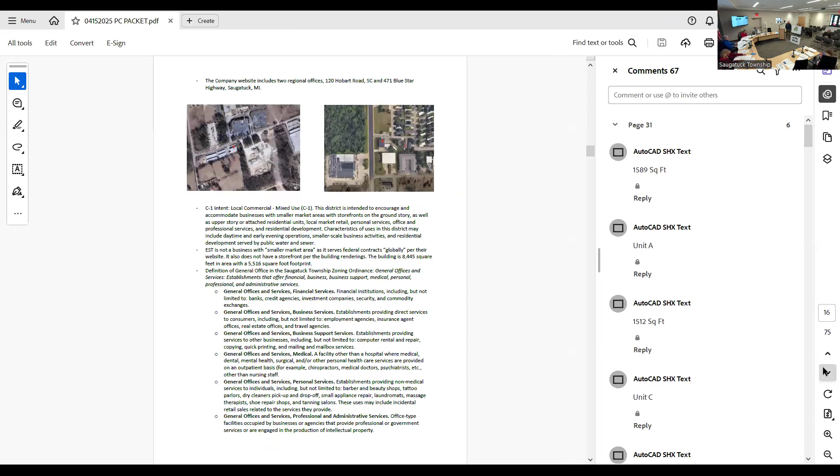For open space, the open space may include the area along the east parcel line, which is where they're showing the trail. They're still showing a trail, and their notes reference that there would be strategic clearing, but they do intend to put a trail there. We received some comment questioning whether that's necessary, or whether it could just remain untouched open space.

The trail is private and the pickleball courts are private.

In terms of the site plan itself, I went through the comments on the parallel plan. I think some need to be adjusted. They did update the lighting fixtures. They do have more parking than is required by the ordinance. So we question if the pickleball courts are private, then is parking necessary back there? And any reduction in impervious surface would reduce the amount of stormwater runoff and the need for a drainage basin of that size. We don't have review letters from the fire district at this time.

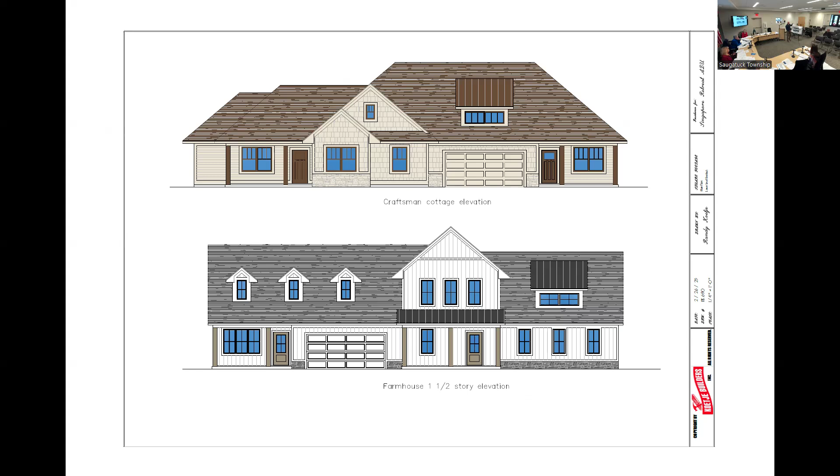This lower one, I was gonna go through everything, but we'll get it a little bit at a time here. So the lower one here, those, that's four units. These two buildings here, those are the side loaded, corner, if you will. The rest of them are either the Craftsman. So these are two of them, those are the side loaded. They're all side loaded, but this is a 1.5 story, the farmhouse bottom rendering there, just on those two. Corner with this.

Do you have the rear of that one? No, we don't. The rear of the townhome? I don't think so. No, it's not even drawn. Okay, exactly, maybe, we'll see.

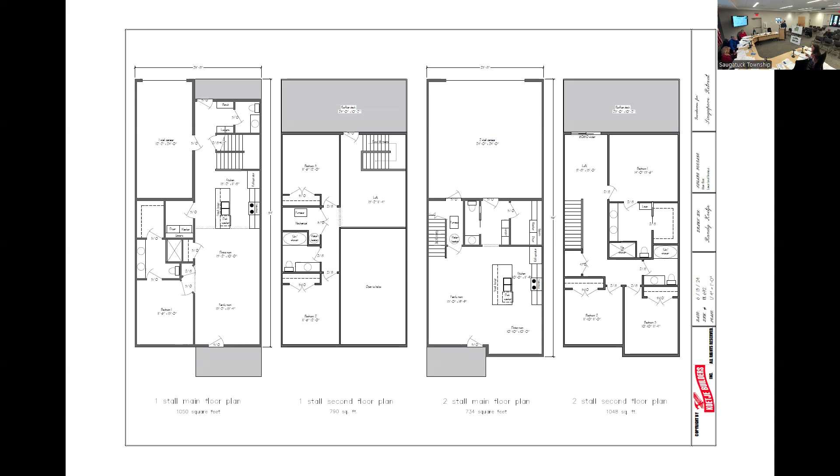That's all I have. Yeah, if I could go through a little bit here, Lenny's hit most of it.

I'm Todd Steiger from Exxel Engineering, for the project, with Randy Koetje here as the applicant.

Since the first submittal, we tried to respond to as many of the comments from your staff and the planning commission as possible. The primary change, as mentioned, was reducing the number of units from 32, which is more of a fire department requirement. Anything more than 30 units, according to IFC, requires a second access.

So we dropped 2 units, and those 2 came out of the townhome here, and everything pushed closer, allowing more open space along the roadway. The other thing we did was remove the 3 optional ADU units. So now we're at a total of 30 units on the site.

Just to refresh our memories, because we talked about extending sewer to the critical areas, we are extending sewer from Blue Star Highway into the site, and proposing the water main down 135th. Currently we're showing it closing this loop off from 64th. So we're showing both this offsite sewer and water main to close the system loop. I mention that because I think it comes into play later in the bonus section.

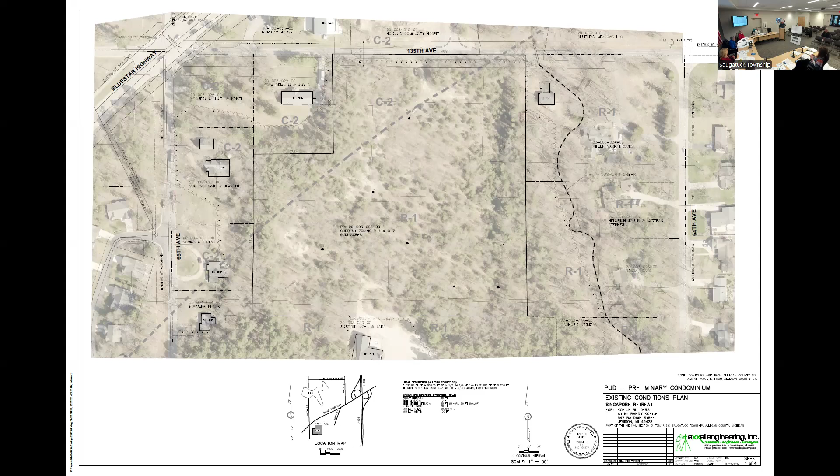I have to question the fact that the trailheads start from the public sidewalk too, if they're not public. They dump out onto the sidewalk. So it would depend on what is south of it or to the right of it, as far as whether that's going to be a trail that can be used in the future. I don't know enough about the parcels.

I don't disagree with that. As soon as you bring it out to the public trails, now you're inviting people again. I think we could just meander this back to our own internal system. It'll prevent us from taking any more trees down near the right of way, and it'll discourage people.

Do you want the trails for marketing? I don't know. They're one of the more used items, I think, in the neighborhood that you can offer, so yeah, it's desirable to have some trail there that people can roam around. But you could do it over by the pickleball, not by the creek.

Yeah, I think that would be preferable, and this is one of the narrower areas. You're right, I think that's a good call. People have dogs and they like to walk, things like that.

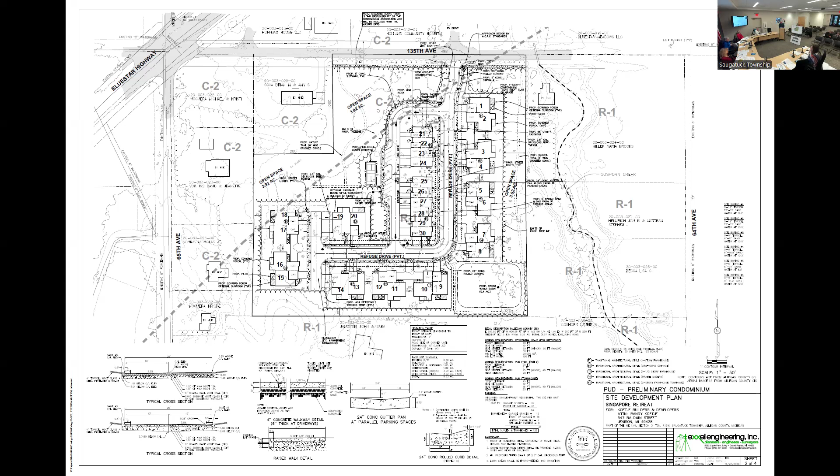My only comment about the architecture really is the townhome. Can you show that elevation? I was just wondering if there could be any variation in the windows. I think they're counted, there's seven identical windows in that building, just looks more office building-like than it does residential.

Well, there are a lot of gables and you could also change the material as they pop in and out, but you're right about the windows, you could gang them up. Say it's just a living room area. Visual comment. Yeah, I think we certainly could. Some of them could be grouped, or I mean, they are same size, but it's same proportion, and yeah.

Is this the south side? This is the roadside. So it's the north side, east side. East side, okay. We haven't seen the alley side, but hopefully you can bring that up next meeting.

You made a determination about the side garage. Yeah, if that meets the intent of the ordinance, we limit the frontage to 40%. And so they're doing the side loaded. I like the side loaded. I don't know whether it meets the ordinance, but I think it helps a lot.

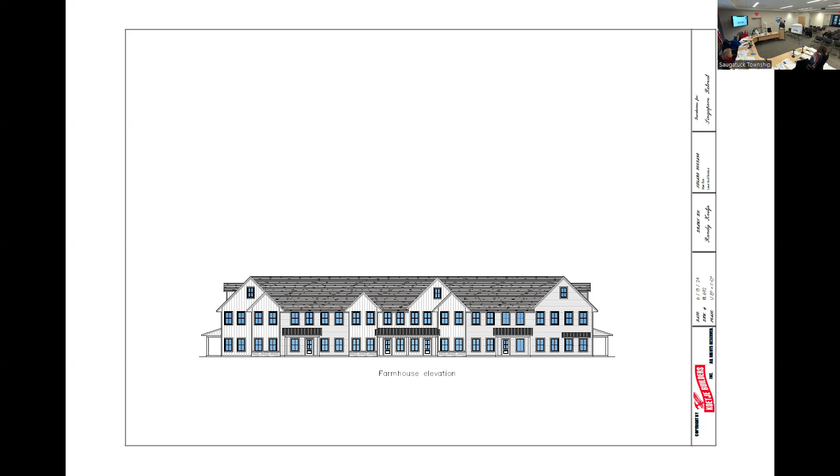Does anyone else have any comments that they would like Cindy to add? I was going to say something. Oh, I'm sorry, Cindy. I just would like to concur with Ken about this, the utility services, the water and sewer. That really has to be resolved before we keep spending money that might not go anywhere.

Definitely have more knowledge than many of us here at the table. Some, but not much.

Do we want to, I think at this point, take a motion to postpone? Subject to the criteria that's been listed here tonight, to give this gentleman a chance to get with Lene, and Lene a chance to get with our engineer to find out what is possible and what is not. And if so, I'll make that motion. Agreed, I would support that motion.

Can't move forward. Do you want to set a time and date for them, or just until we're ready? What do you want, just to postpone to the next meeting or until you receive the application? I don't want to bind them in, but if we get that application, we can get it noticed and have that rezoning hearing. The next time, you have to talk with the engineer and get. Yes, I do have all that stuff. It may or may not come up at the next one. Right, so my motion is, until it's ready to be brought back.

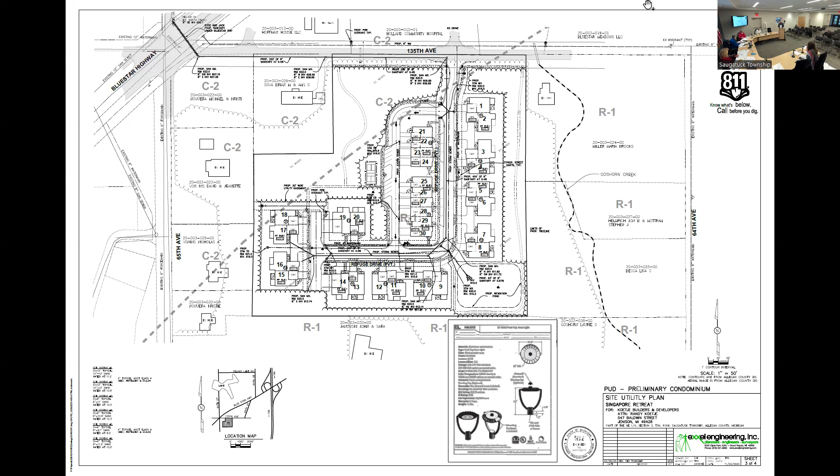Do you have any presentation? Yes, I guess on Zoom, perhaps we have the author of the conservation plan. I do have to leave at 8:30, don't know how long the presentation will take. Oh, they're not on Zoom, okay. Well, we will invite them to our next meeting to present that conservation plan. We do not have the author of that plan joining us at this time, but we can certainly make sure they're invited to the next one. It's worthwhile, but I'm not qualified to speak on it, so I don't want to do this.

I assume it's Barry. Here's mine, right? Yeah, I think it's gonna be coming to the meeting. I had thought you might be joining us on this call, but provided for the next meeting. I'm sure Jane will coordinate with Mr. Monick, and if it's possible for him to be available, he will do so. Yes, it would be great to join us.